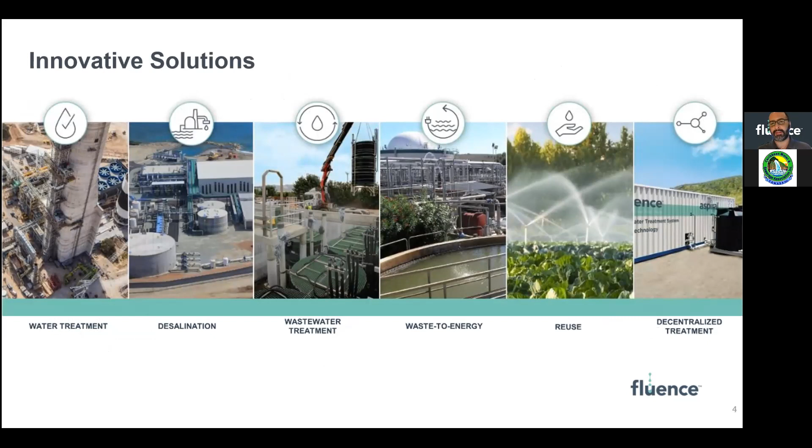In the different solutions Fluence focuses on, we have water treatment, desalination, wastewater, waste to energy, and reuse, and we try to emphasize what we call decentralized systems. Let me know if at the end, or at any point, you guys have any questions—feel free to interrupt. I know my English is a little broken, so I beg your pardon for that, but just keep smiling and try to follow as the conversation goes on.

Mainly, what Fluence focuses on, and how we see the future of water, is what we call the cycle of water. The cycle of water goes pretty much from reuse to treatment to delivery. So we try to make sure that you guys, as public entities and government entities that manage water, always try to close the cycle.

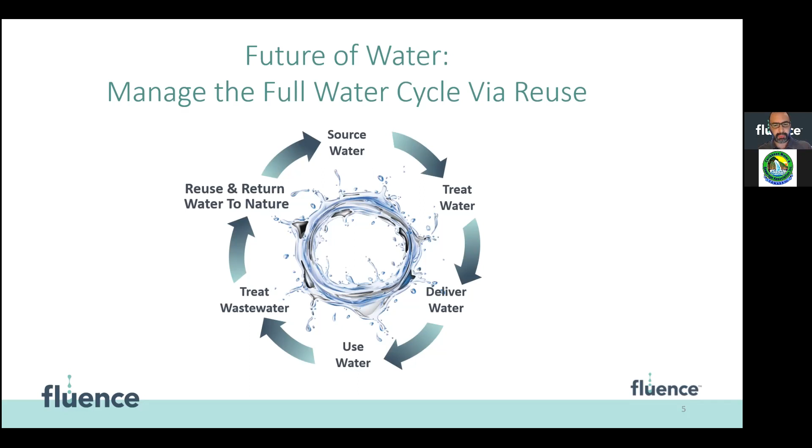One of the things we're going to be approaching today is wastewater. It would be a shame if we're still seeing wastewater treatment plants dumping the reuse into bodies of water after the wastewater goes mainly to the wastewater treatment facility. So that's kind of the perspective we're looking to move away from.

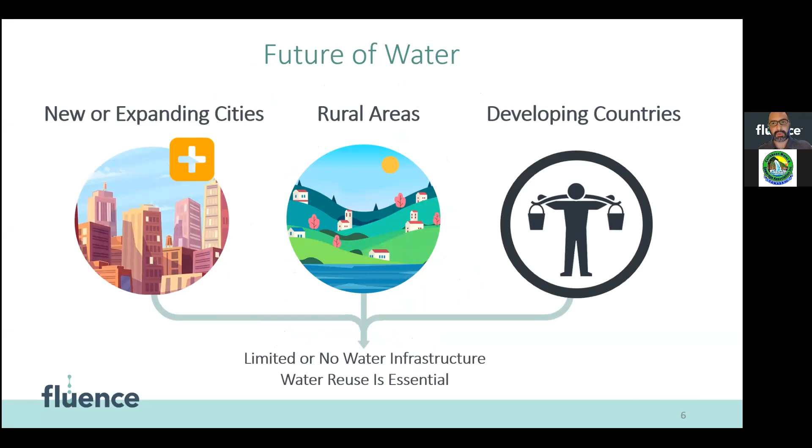Right now, with the future in new cities that are expanding, new rural areas, and all those developing countries where there is very limited or no water infrastructure, it's very essential for us to put good attention on what we are going to be doing, or how we rethink water and what the future of water is going to be for us.

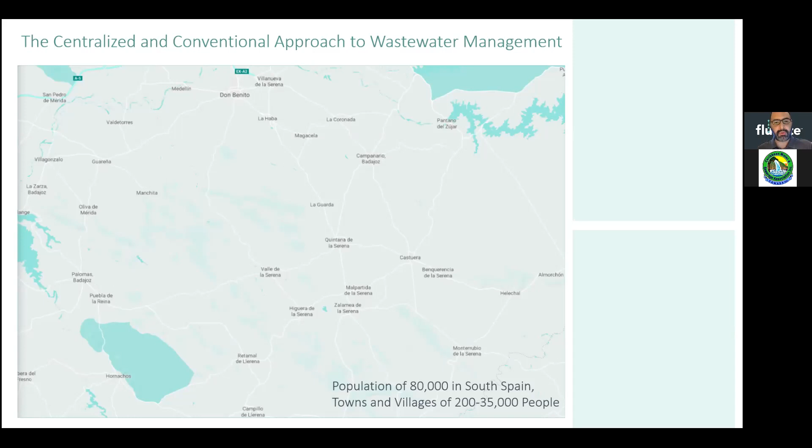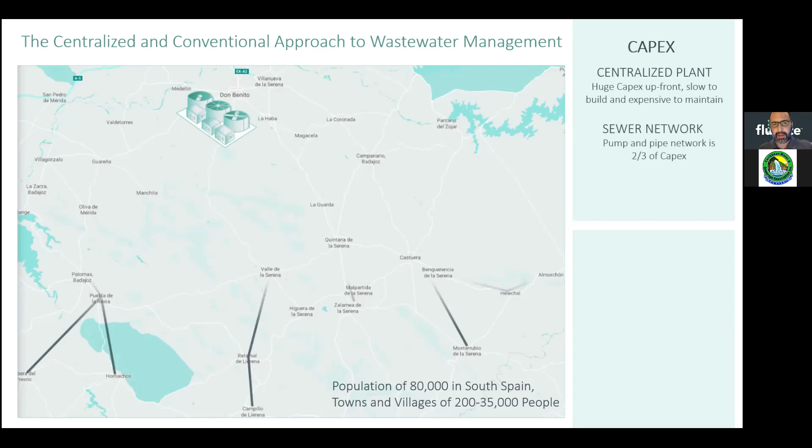Right now, we are going to be focused on the centralized approach, which is very conventional. Everybody in the Caribbean, South America, Central America, is very much stuck into those big mentalities where you have a big wastewater treatment plant, a centralized wastewater treatment plant, and also an infrastructure that pretty much covers two-thirds of the total CapEx that is going to be exposed.

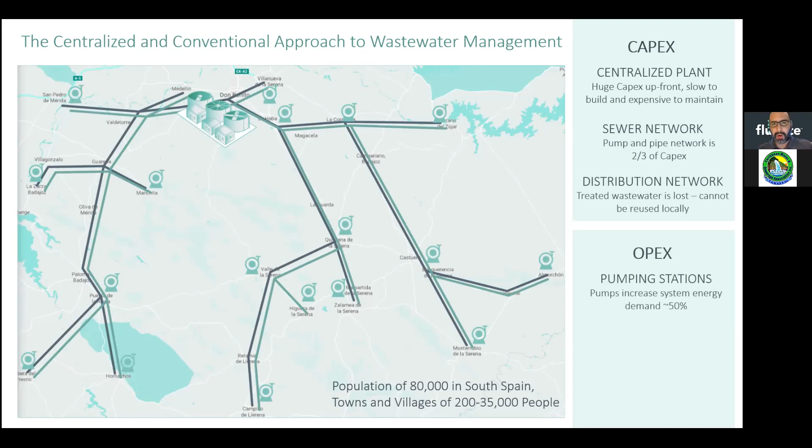At the same time, there's all the distribution network you are going to have. When you add that to the OpEx, you realize how much we are going to invest into the pump stations, the maintenance, and the failures and leaks. So when we talk about all those centralized and conventional systems that apply to all of us here in the Caribbean, we need to move away from that mentality.

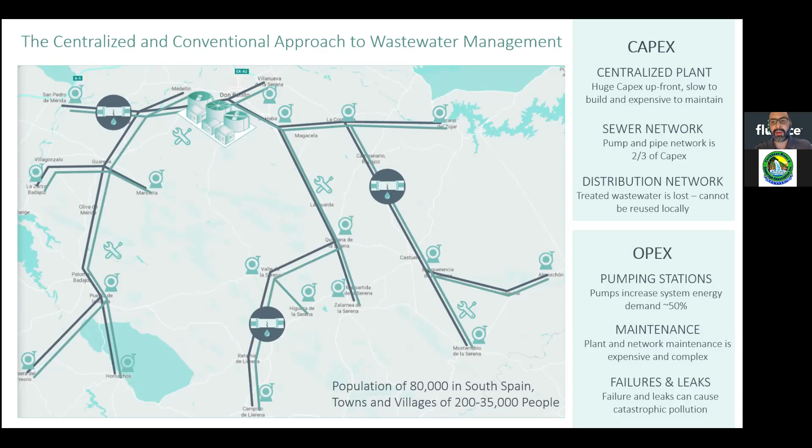As many of you in the infrastructure realize, sometimes the different islands don't lack enough water production or enough water treatment plants. They probably have enough to produce and supply to the whole community, but unfortunately we lose too much in that infrastructure, the piping, and all those centralized systems and equipment that unfortunately make us lose production.

In some cases I've seen in the Caribbean, losses can run up to probably 40% of the total production. I don't want to mention the names of the islands, but I've seen cases where the water lost through leakage could probably supply the whole island.

But at this moment, they are in need to start getting biddings for new projects, for new desal plants. In reality, it's because the infrastructure has degraded and needs rehabilitation. It's a topic we can probably talk about some other day.

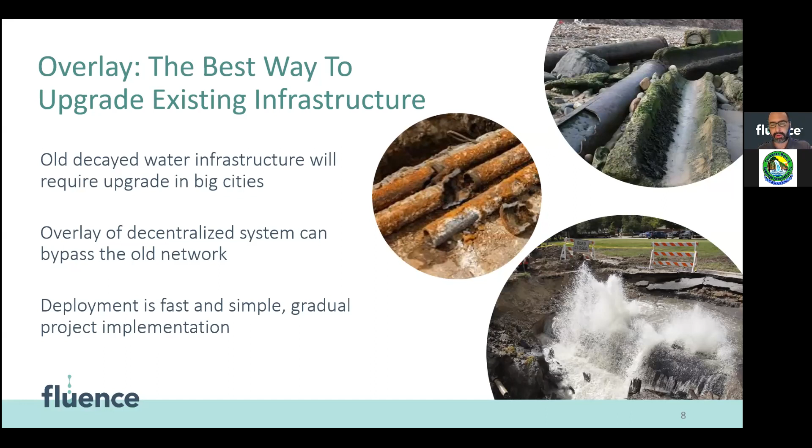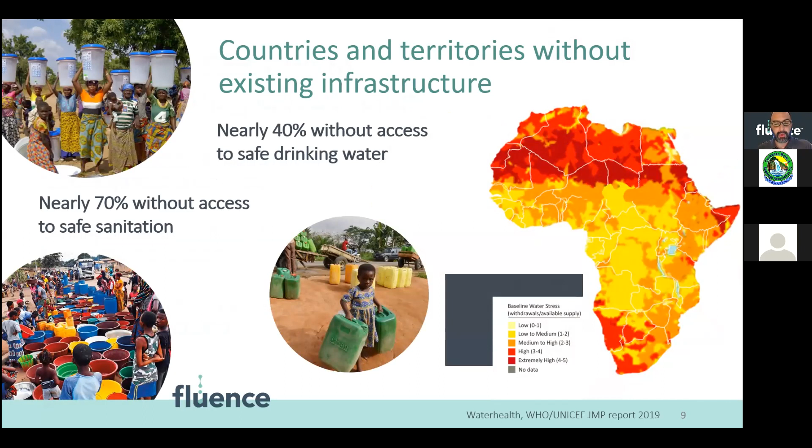So right now, when we think about different countries and the existing infrastructure, and put this all in numbers, we get to the cruel reality that 40% of our communities worldwide don't have any access to drinking water. And it gets worse when we talk about wastewater and sanitation.

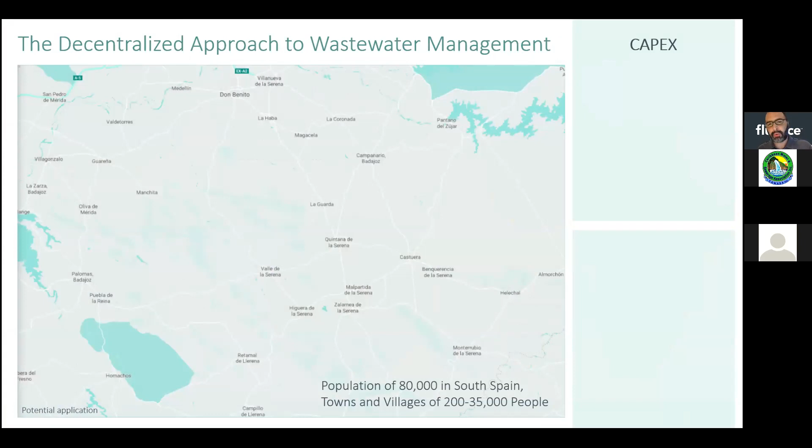So the reason is, when we decide, as FLUENCE - not only FLUENCE, I'll say most companies right now are moving to decentralized systems, where each community is responsible for their own wastewater and their own water treatment plant. That helps ease the CapEx, and it actually helps eliminate costs on piping, pump networks, and large pipes.

When you have those decentralized systems, it's very convenient because you can communicate all those networks. We are in an era of technology - many of you are in different places, and look at us, we are communicating. The same applies to those decentralized systems, where we have a distribution network that is connected.

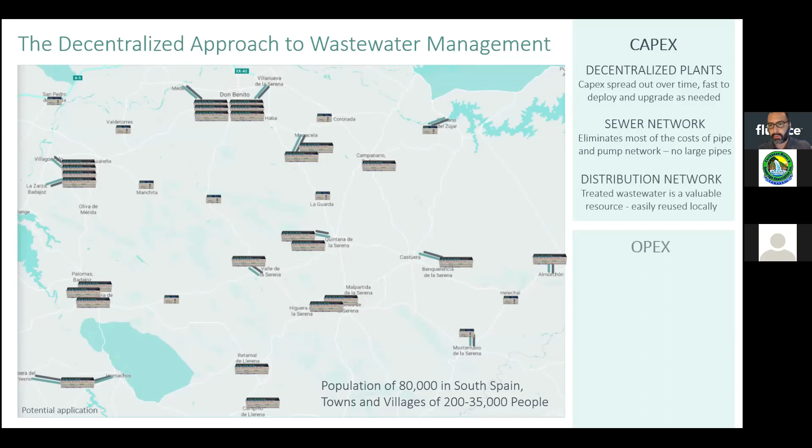When we look at the OpEx and efficiency of the plants, you can reduce energy costs, you can reduce pumping rates. In the operation of the plants, once you have a network, you have a team that can help, or the same communities can do the maintenance - it's just about being vigilant, with communities on top of their wastewater or water treatment infrastructure. So that's the operations side.

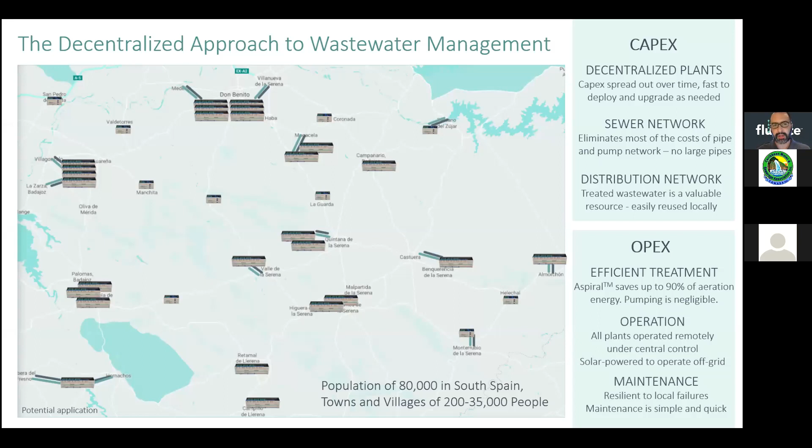And the best part, when you have different kinds of standardized units or a standardized decentralized approach, is that the maintenance becomes easy. You don't have a thousand different parts for pumps, different pipe sizes, or different types of PLCs. You basically have one common system that serves the whole distribution network.

And when you compare the two systems, the centralized and the decentralized, in reality, if we put it in numbers, the decentralized approach can reduce about one-third of the CapEx you would be investing compared to having a centralized, big plant.

Probably the last time that I saw a bid for a big plant was way before 2018, pretty much in Mexico. But in the Caribbean, if everybody starts noticing it, everyone's trying to be self-sustained in small communities, because that's the way to go: to decentralize. You have more value, and at the same time, you get the communities involved and establish their current needs. It's easy to upgrade those plants, so it's a fast delivery and installation.

Right now, not only Fluence, but many other companies are doing plug-and-play installations. Everything is a container or a prefabricated unit, and the civil works are very limited to doing a slab or pillars where you let the plant rest. Everything is coming plug and play.

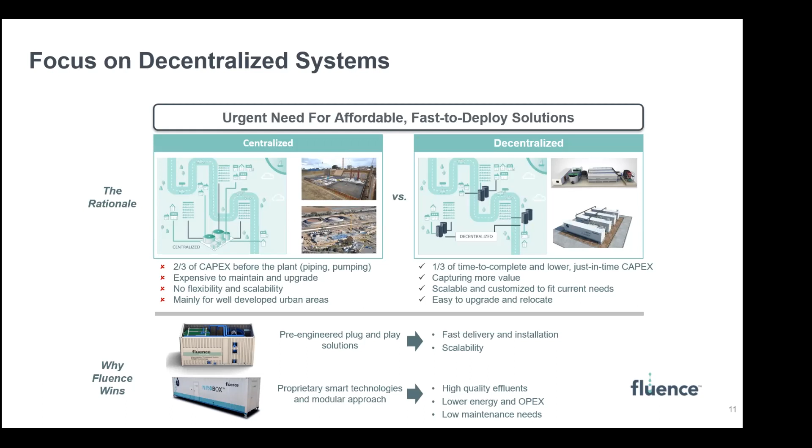You use your inlet, your outlet, how you're going to treat your sludge, things like that, because everything is already prefabricated. So in the different scenarios we have, we try to focus on containerized package systems, because it allows you to be modular, more creative, and easy to deploy. While you do the civil works, you can pretty much build the plant at the same time, so your time is diminished.

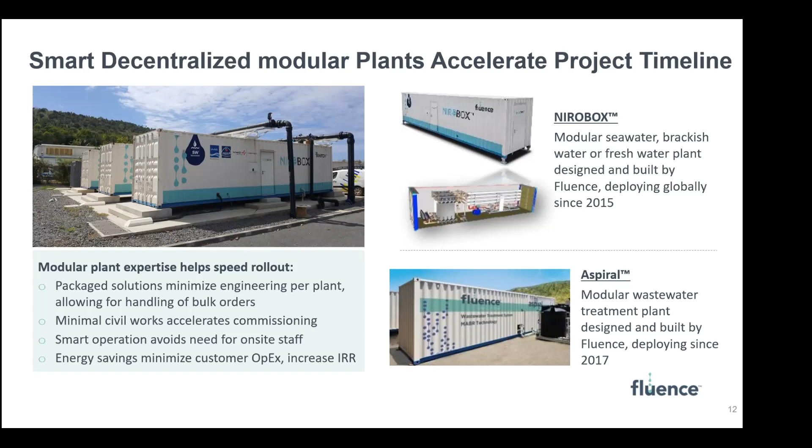Just to give you an example, a plant that we built in Cyprus, this island in the Mediterranean, is 55,000 cubic meters per day. From A to Z, I'm talking from the moment the engineering starts to the moment we commission the plant, it took an average of 8 months, because we were doing everything together.

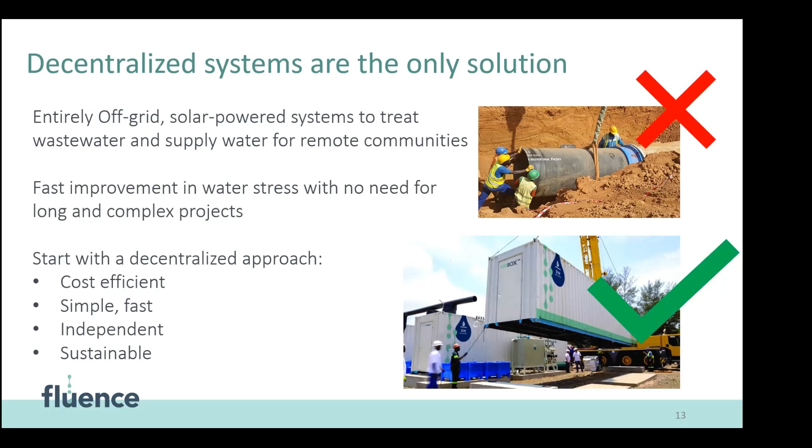So when we go for the decentralized solution, it's because we're trying to be more cost efficient, we're trying to be faster, we have to be independent, and the most important part is that everybody's trying to be sustainable. Sustainable is when you give ownership to the small communities to be on their own, to be self-sustained. That creates a kind of ownership from them to replicate and take good management of the plants or equipment that's handled to them.

Coming back to the future of water and wastewater, right now for us at the different companies it's about the CapEx. Every single company is focusing on reducing the CapEx, and that's pretty much trying to diminish most of the civil works, so you can probably get a better approach.

And also energy costs. Remember, we have to move from those old, good, conventional, very humble processes to processes that have to be more efficient. When you have a wastewater treatment plant where 70% of your bill is the energy cost, you have to look for different options.

Not only that, but look at the different regulations being applied in different countries, in the Caribbean, in the US, where we're moving from just looking at BOD, COD, total suspended solids, conventional TSS, dissolved oxygen, but also looking more at the toxicity of the water and nutrients. So right now it's more about the total nitrogen being removed by the plant, and the total phosphorus.

Unfortunately, if we go by the conventional process, that's not feasible up to some point. And if you want to upgrade the plant, you pretty much have to build another additional tank, or different components, to allow you to reach that goal.

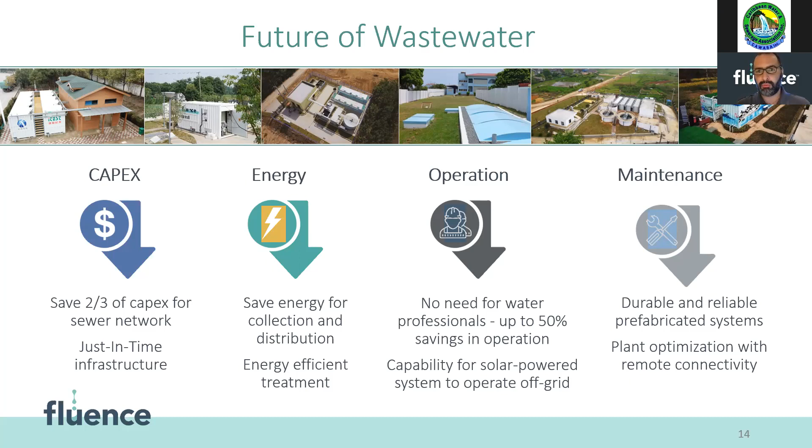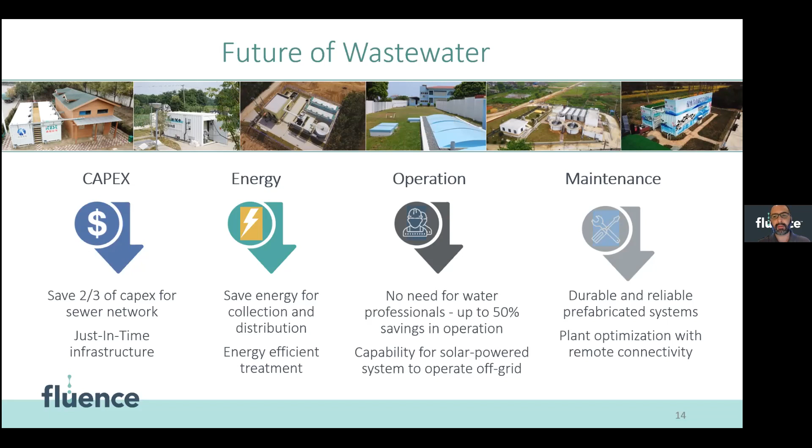Right now, most of the plants that we build are not only for our own personal commitment, but also for liability reasons, and to provide additional information. As FLUENCE, we have most of our plants in remote monitoring. That means we have access to getting the information, and at the same time we imply to the customer: you have to collect the information, put it on your phone, put it on your tablet, by all means, but don't leave it on just a piece of paper that is going to be handled later on.

So right now, one of the processes that we are implementing is the MABR. Many of you already heard it's the membrane aerated biofilm reactor. We have to focus on this: one, it will be the retrofit, and also what we are saying is it's going to be more like decentralized systems. But prior to that, for those that don't have the concept of the MABR clear, let me start with a brief differentiation between the membrane that we all know, very common in our market, MBR or MBBR.

So where the MBR is pretty much a direct filtration process, you have a physical barrier where you have a membrane that is going to be doing the filtration. And in the other process that we are referring to here, let me show you with the point.

So here, when we refer to this, it's the biological process where we are going to have a biofilm over a membrane. I know it's hard sometimes for you to see, but this is what we refer to as the membrane, and this is the material. So here in this part is where we are going to create that biofilm. And look at this, it's pretty much like an envelope, it's going to be a large size, and I'm going to explain later on how the process goes. But at the beginning, I just want to make that differentiation clear.

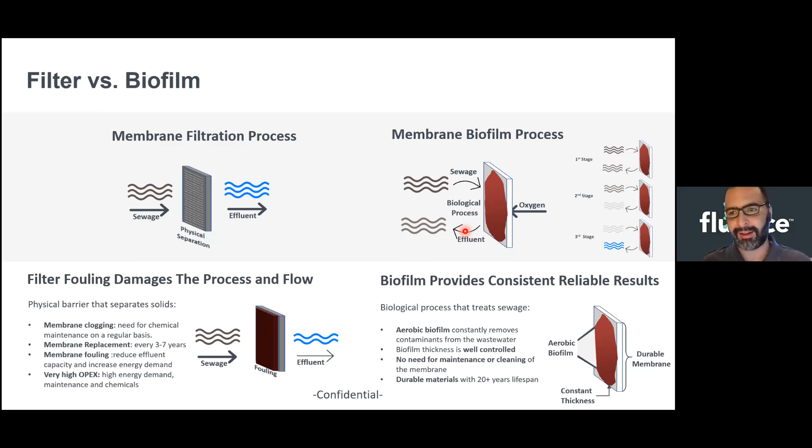When we go through the different processes that we've had over the past 70 years since we started treating wastewater, most of you are pretty much used to activated sludge by extended aeration, but also lagoon systems, as well as MBBRs and SBRs, and those are very common biological processes.

So when we compare what the MABR benefits or evolution in wastewater treatment is, it's pretty much when we talk about the mechanical aerators. When we talk about mechanical aerators, it's probably one of the first ones when we try to push the air or bring the water in contact with the air, to expedite the biological process that is meant to happen.

And also later on, we changed to coarse bubbles, and after that we changed to fine bubbles, and finally we come to the MABR. The difference, as you can see, is the amount of energy that is required to treat a cubic meter in each one of the processes.

If we go into the surface aerators, we are going to be doing 2 to 3 kilowatts per cubic meter treated. So if we go into the MABR, it's a big, huge difference, because we are talking probably less than a quarter of a kilowatt per cubic meter. I just want to make a clear differentiation in this one. When I'm talking about these numbers, I refer to the biological secondary process.

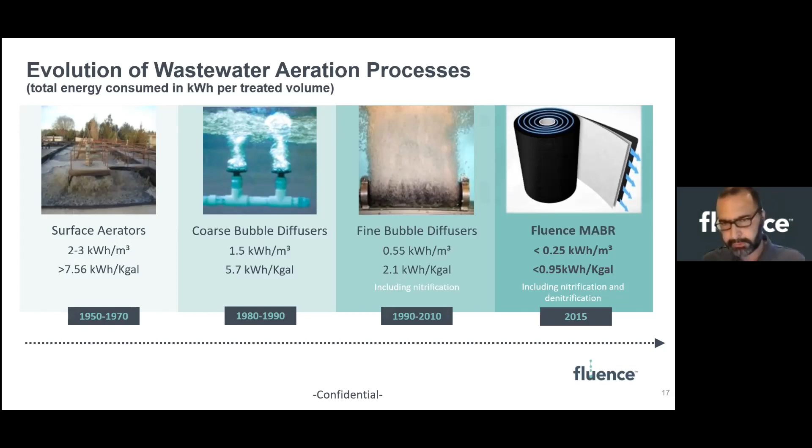So when I talk about the MABR, the first thing that I tell the customers is, imagine it's going to be a stationary bubble that is submerged in your plant. So we are trying to go from a system that only allows you to use 10 to 15% of the oxygen trapped in that fine bubble that quickly runs through the water, to something that is more stationary and allows you to use the total oxygen that is being delivered to the bubble.

So the MABR can also be compared to your lungs. And if you look at the competitors, one of them calls it the ZeeLung, because it's the same functionality. Don't picture the membrane as having little tiny holes, because there are not going to be holes or anything. It's pretty much like the air in your lungs: what needs to go into your bloodstream is the oxygen. It's called the passive diffusion of oxygen into your bloodstream. It's the same. If you look at the membrane, the MABR has the same functionality.

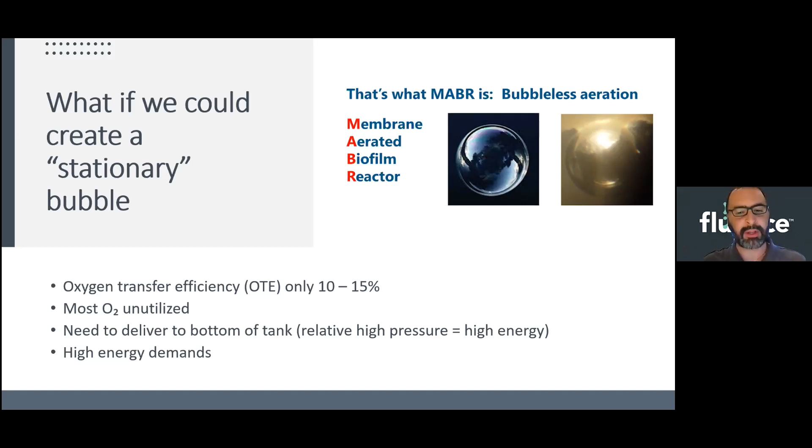So it is trying to find better ways to transfer oxygen and find a more sustainable solution. So instead of having that bubble travel through the column in a matter of seconds, you have this stationary bubble that will, in the end, dissolve into the liquid. So that is pretty much what we are doing with the MABR, or what this technology refers to.

Probably here it's going to be easy for you to understand, because here is the membrane. Ours is a flat sheet; this is for illustration. So here is our membrane, and inside the membrane you have air. The air creates a high concentration of oxygen on that part of the biofilm. If we start following the process, on the membrane there is going to be a growth of the biological film. This is our biological film that is going to be growing.

So in the first stage, we take the ammonia that is here, and it meets the high concentration of oxygen in this part. For everybody that knows, that is the nitrification process. When that ammonia meets the high concentration of oxygen, it creates the nitrates.

Those nitrates take the COD as our carbon source, creating our denitrification process. So here in the biofilm, you have simultaneous nitrification and denitrification, which allows you to save in your aeration basin the energy that would be utilized for removing the COD, which is very related to the BOD.

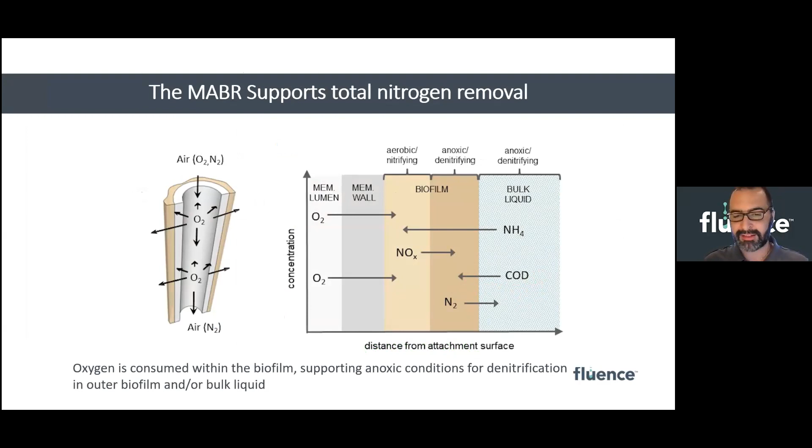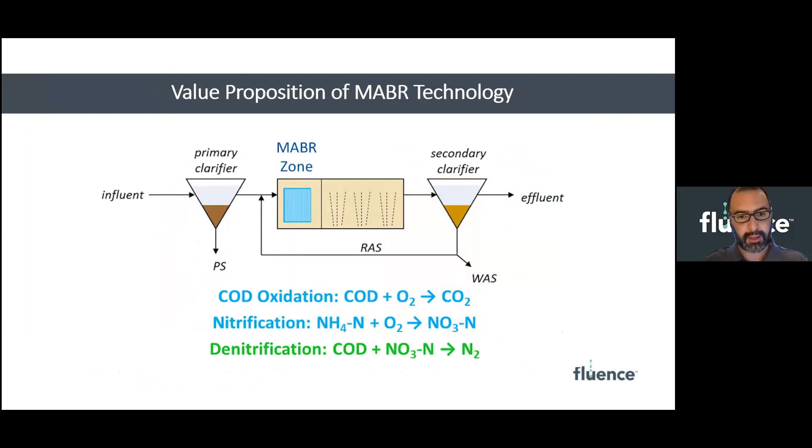So that is when FLUENCE came with a solution: it's better to create a self-breathing membrane with a thin film that allows you to create the best options for denitrification and nitrification. And that's with several years of trial and error to get to the best specifications.

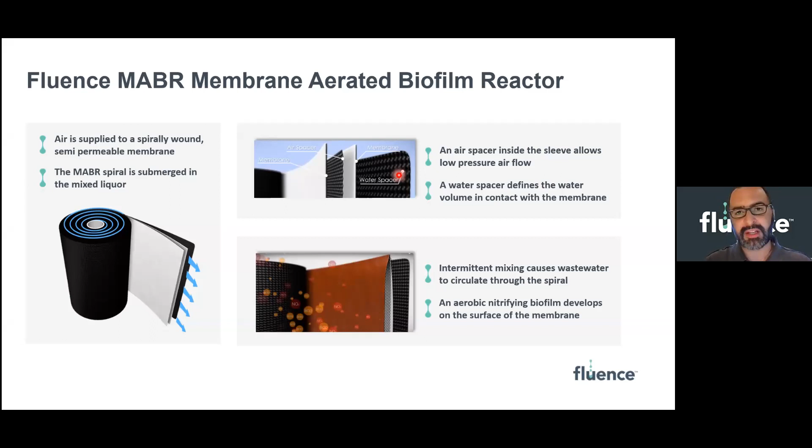So as I showed you before, you have the membrane that is this roll, and in this roll you have the first layer, the membrane outside. Inside you have the air going through, just like a bubble. And you have your spacer in between two layers of the same membrane. At the end, you have this black sheet that is the spacer. The spacer also allows us to grow the biofilm, and allows you to get the benefits when you have good mixed liquor in the process.

So what are the benefits of the MABR process? It's going to allow you to diminish many of the nutrients that we are looking to treat right now, especially the total nitrogen. With the MABR, across the different plants, our common denominator is to get results probably below 5 in total nitrogen.

The total phosphorus, we can say we remove almost 90%, and that is because of the biological process. It came along through trial and error, because we never looked to remove phosphorus at the beginning, but through the different iterations, we realized that the biofilm, depending on the thickness and the stage, allows you to do a better gradient removal of the phosphorus.

The second most important benefit, I will say, is the energy savings. If you have a 200 horsepower blower, you are not going to need that 200 horsepower blower. You are probably going to need a 20 horsepower blower. It's going to do the same function, but with less energy required, because most of the process is being done by the autotrophic and heterotrophic bacteria in the nitrification and denitrification.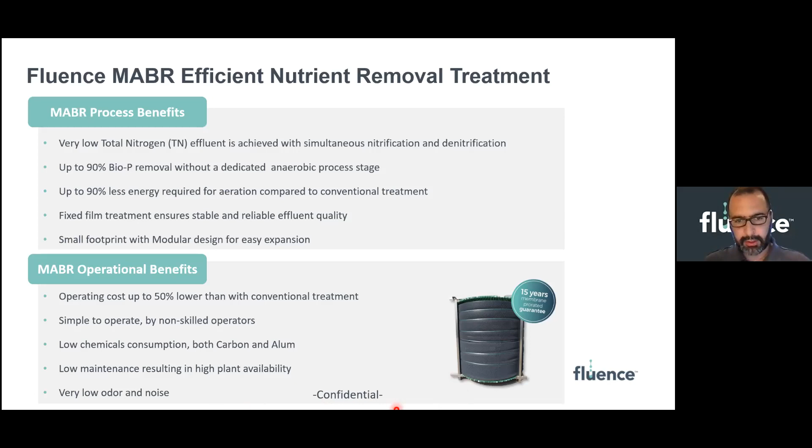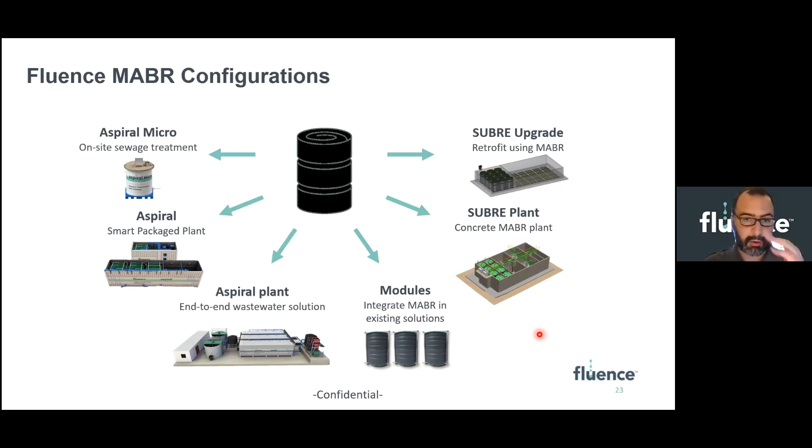So right now, going to the different processes of the plants, these will be the configurations that at Fluence we have. We have the micro, that is for small households, farther away communities. We have the Aspiral, that is going to be the package, hotels, condominiums on a larger site. We have the Subre models, and the upgrades: Subre Greenfield, Subre Retrofit, and it's going to be the upgrades for the plants.

So these are the different capacities that we are trying to go with the Aspiral, the containerized units, and it will be from 20 to 50 to 5,000 cubic meters per day. Greater than that, it will be feasible. Unfortunately, it will be too much horizontal construction. And sometimes in the Caribbean, we know that the land has some value. So we can move to different capacities, for example, when it's 2,000, move to a Subre, when we can do a vertical construction, so a deeper tank,

it will allow us to do a more efficient and much smaller process. I have a case right now, for example, in Panama, where we are changing a 14,000 cubic meters per day wastewater treatment plant by oxidation ditch. And the reduction of the area is 2/3 of the oxidation ditch. And in this case, we have 4 channels, trying to mimic the 4 trains of process that were there. So it's a very good reduction when you can do deeper tanks, because the Subre models will allow you to do that.

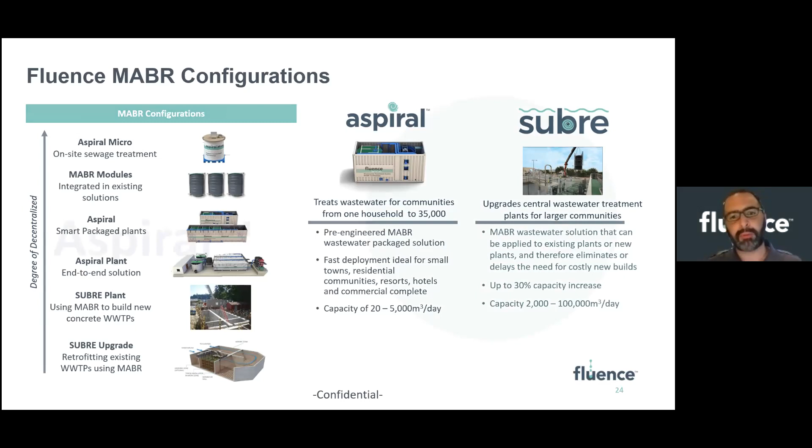So these are the Aspirals. As I mentioned, we have the small one, a 20-foot container, which can be 50 cubic meters per day. The 40-foot containers, the Aspiral M, is pretty much everything used in the plant, where you have your clarifier, you have your aeration, you have your recirculation. The only thing that you will not have will be your equalization tank.

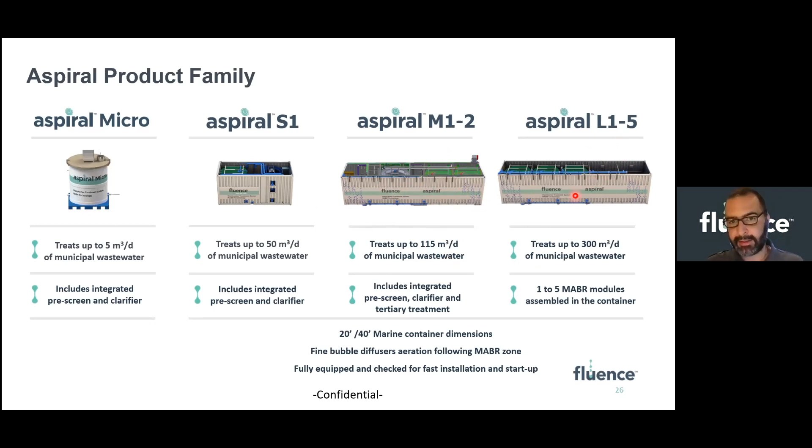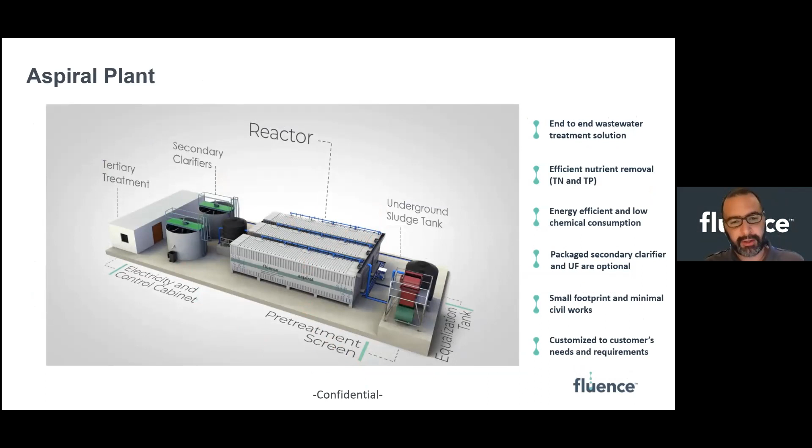And you have the Aspiral L, and it's for when you want to build your secondary clarifier, and you just want to increase the capability of the reactors, you don't need to buy the units with the clarifier inside. You just go and buy the units, and you just build your clarifier, keeping in mind that your pre-treatment is still doing the same.

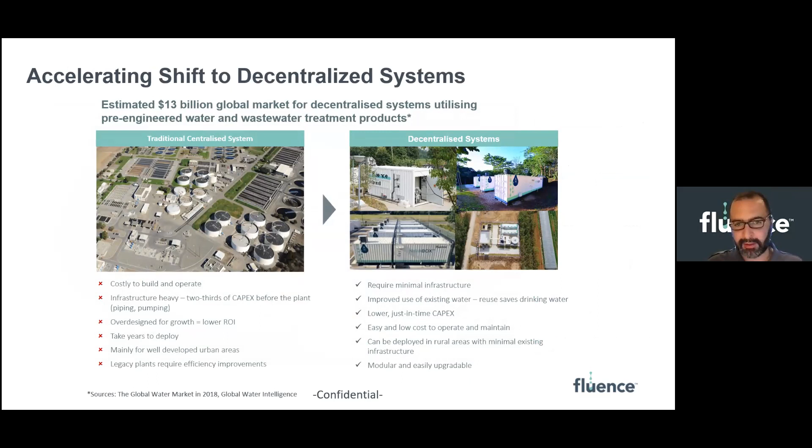This is pretty much because we want to accelerate those decentralized systems where there is minimal infrastructure, and pretty much everything in the plant is plug and play. So everything is ready to put into the plant and ready to roll on. Even the control panels and the instrumentation - but don't forget that at some point you have to bring electrical power from the plant to the mechanical equipment, like the blowers mainly, because those are usually put outside of the plant.

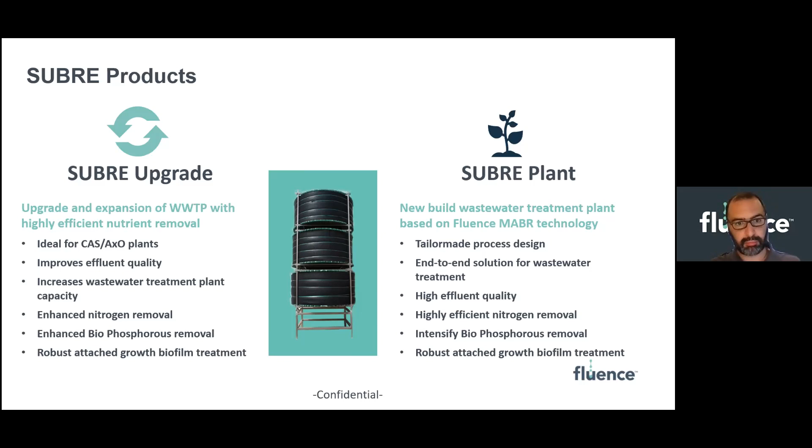This principle initially applies when you want to retrofit some plants, or when you have new but deeper tanks. In that case, yes, we can reduce the cost, we can enhance the nitrogen removal, and also when you want to increase the flow of a facility, we can help you with that. But also keep in mind that when you want to increase the flow, you're also going to have to increase at some point the junction box, or probably the pumps that are feeding the plant. Because not only will it increase the flow, but the pretreatment has to be increased in order for you to handle all that flow with the same infrastructure.

And it's very convenient because we don't have to add all that conventional infrastructure, like another mixer or another anoxic tank. It was very commonly used by us in the past.

So when it comes to the operator part, I tell them this is a static element that you're putting into your plant. So it's the same operation that you've been doing on blowers, the same operation you've been doing on diffusers, the same operation you've been doing on pumps, when you compare it with the conventional process. This is the membrane - the other thing is you have your inlet and your outlet, and these membranes are built to last at least 15, 20 years.

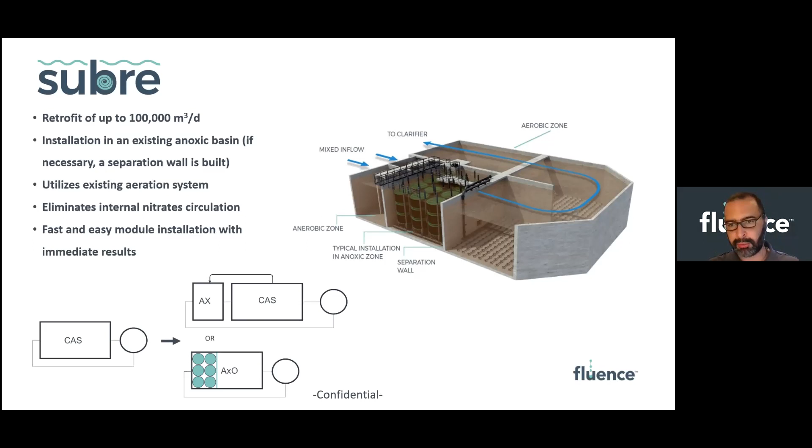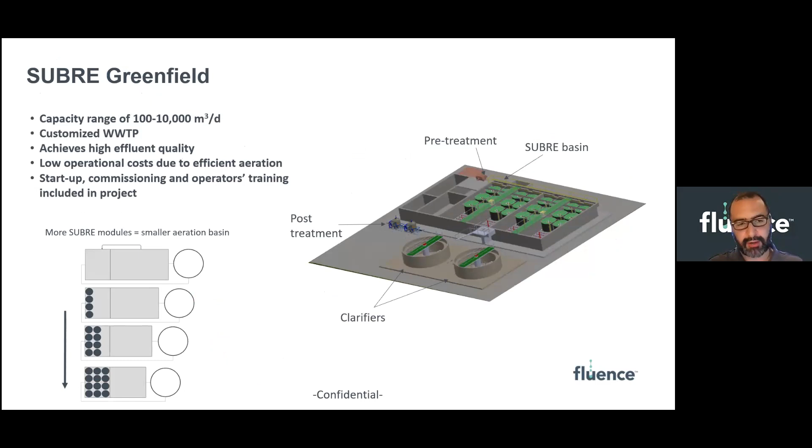So this shows the different configurations you can see on a plant, in case you want to diminish all your space and add as many MABR elements as you have in the plant. Keep in mind that your energy cost will probably get lower and lower over time.

So here are some of the results we're obtaining when it comes to treating the COD in the different stages. Compared with the conventional process, it's more likely that we have more removal, but with less energy consumption.

Remember, in one of the initial slides, I showed you how the process works when we take the COD as a carbon source with the nitrates for denitrification. The same thing applies here - the COD that gets to your final clarifier is going to be minimal.

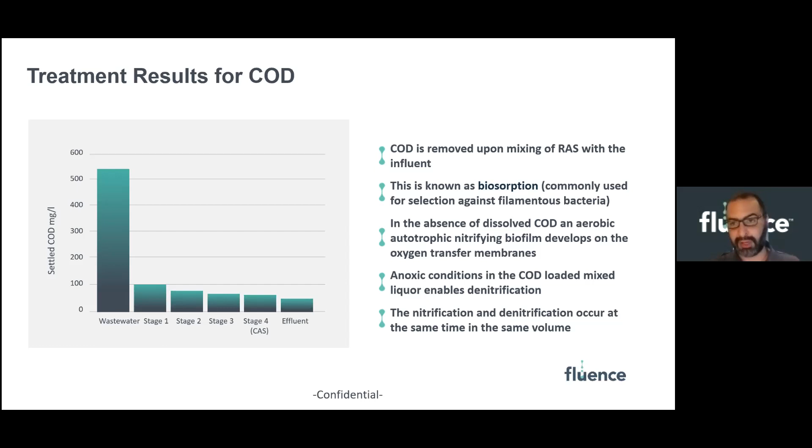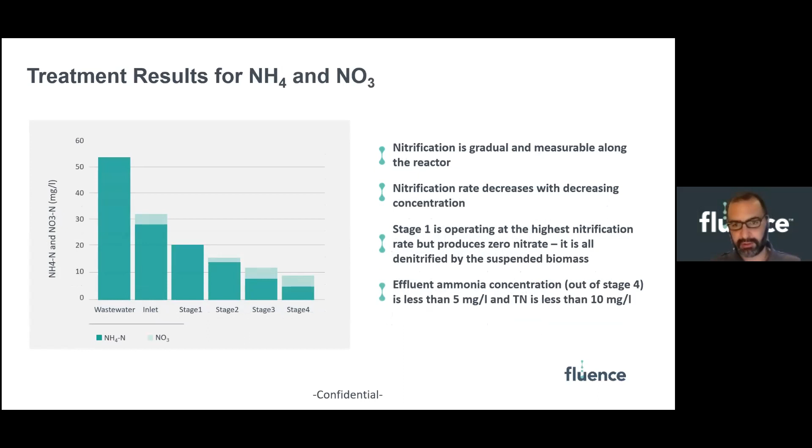When we're talking about the ammonia and the nitrates, it will be the same stage - you're going to see more and more reduction as you advance through the stages. The total phosphorus at the beginning, you're going to see it's not as efficient, but as you go further into the stages in your plant, you're going to get more and more efficient reduction of the phosphorus.

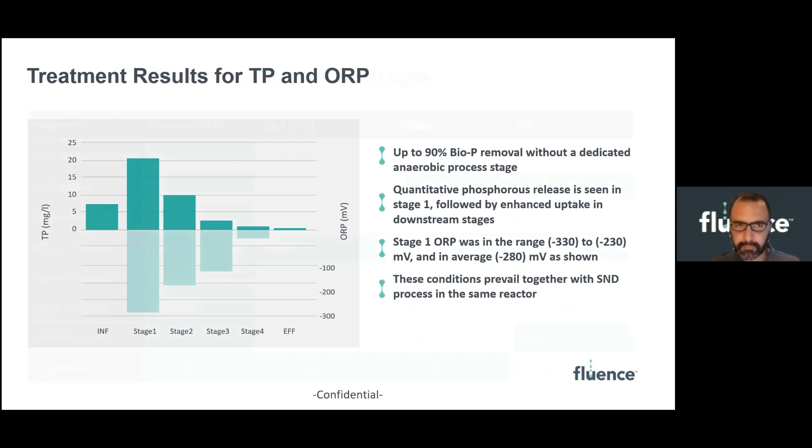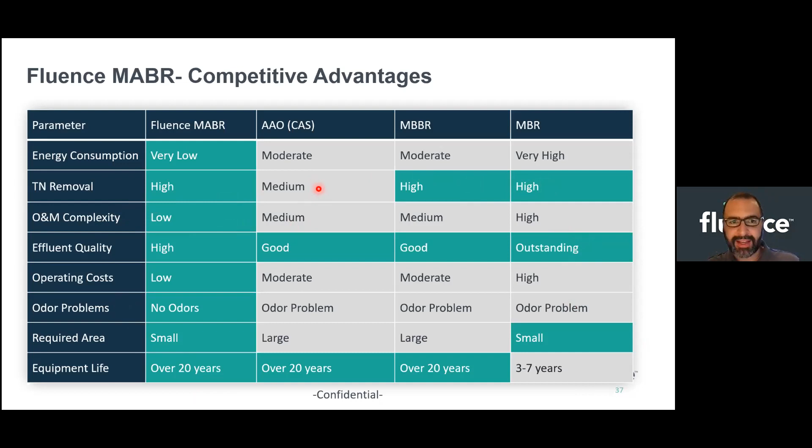For example, if we compare all of these technologies with effluent quality, there is no doubt that the MBR will give you an outstanding quality. The MABR will be better than the conventional while energy consumption is less. Total nitrogen removal, for example, is very high in these cases. But when you compare with the MBBR, the energy consumption is not as great as it is with the MABR. So this is a comparison of why the MABR wins against the others.

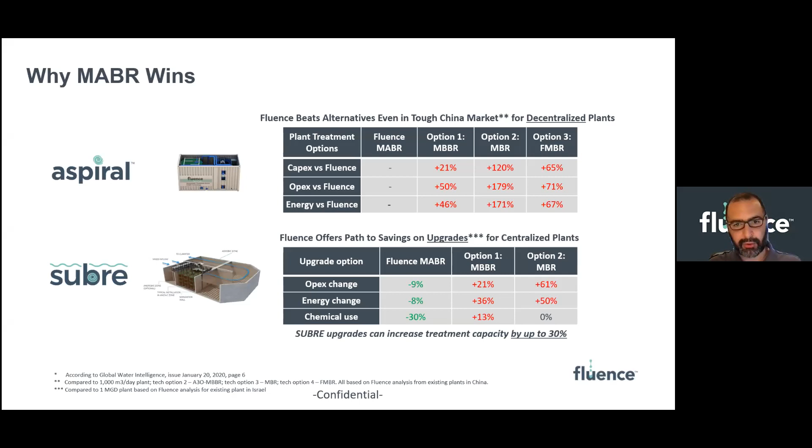This is pretty much by the numbers, and not only by Fluence, but by different entities, we are getting this technology validated by different entities.

So most likely common right now for you guys, it will be Stanford Engineering, the Stanford University, Black and Veatch, we already being validated. CENTA is another institution of wastewater treatments in Spain.

I remember as it happened in Jamaica, it was a process of almost 2 years to get the technology validated, but it's being implemented. And as it's been implemented in one particular Caribbean island, I believe it could be implemented elsewhere because the benefits are greater.

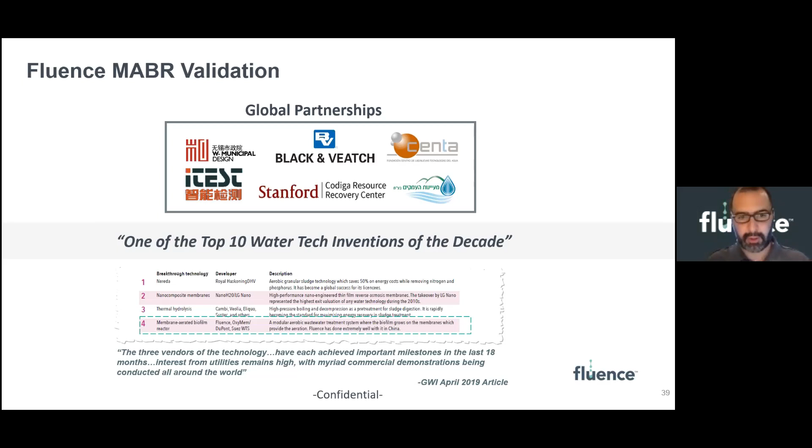So all that brings us to pretty much a summary of what Fluence is doing for the environmental and sustainability impact, due to the different projects and how we are participating.

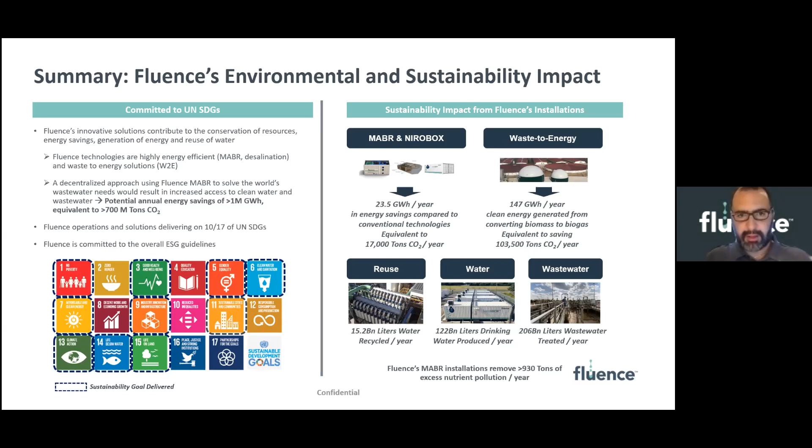That is good for you as well, how to participate in and try to commit to all those 17 goals, where Fluence at this moment is pretty much committed, allowing you to cover 10 of the 17 goals based on what we are approaching right now. So this is the sustainability, the 17 goals.

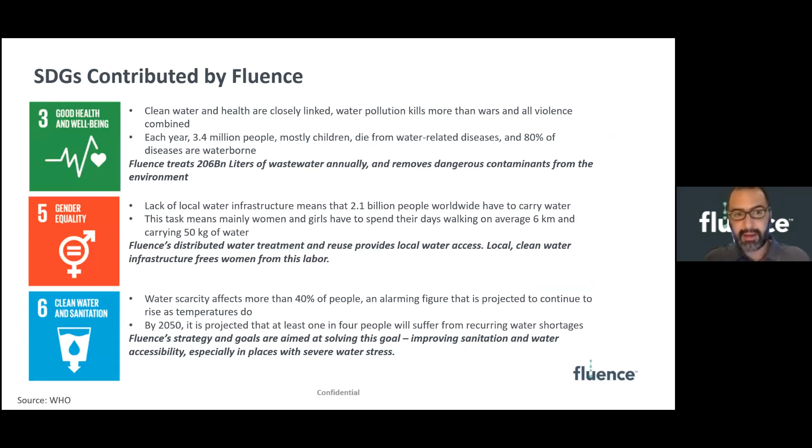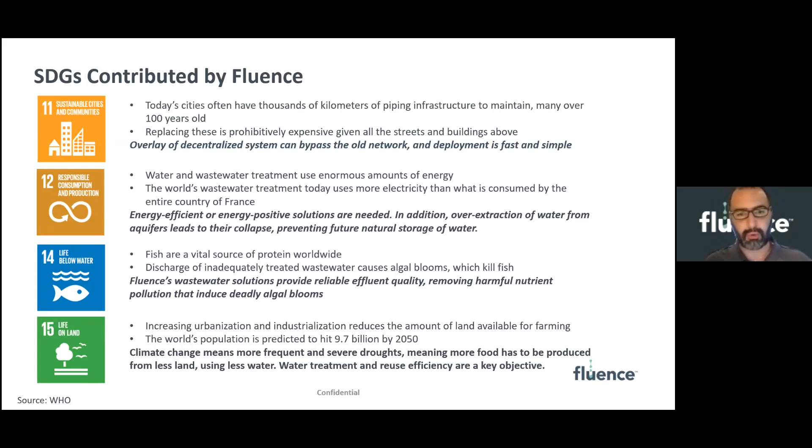For me, the most important is that we are actually participating in clean water and sanitation, and also affordable and renewable energies, as well as being a sustainable option for the different cities and communities we are working with right now, getting into the new phase to be self-sustained.

So by the numbers, pretty much the annual savings on energy that Fluence is approaching is close to 23 gigawatt hours only by the MABR, and also the NIROBOX.

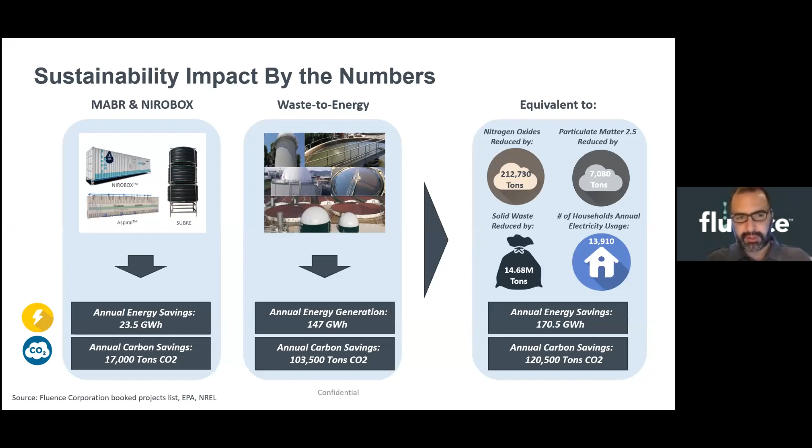That is a desalination plant where Fluence has at this moment the most efficient plant in a single container when it comes to energy use. Through different other projects like waste to energy, we show how much we are saving on carbon, the annual impact that Fluence produces.

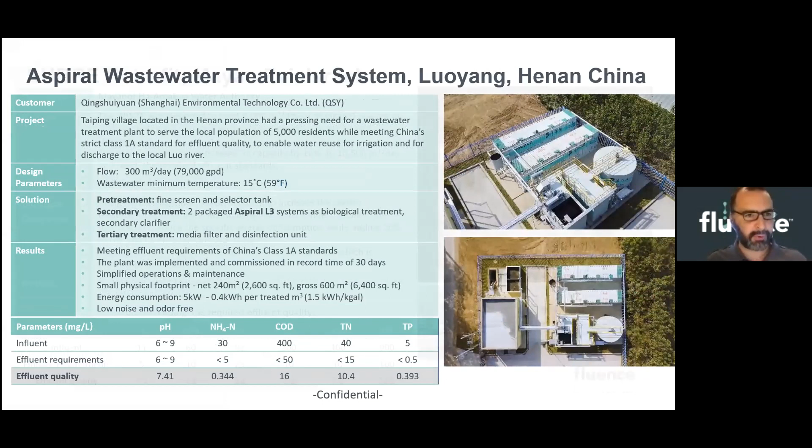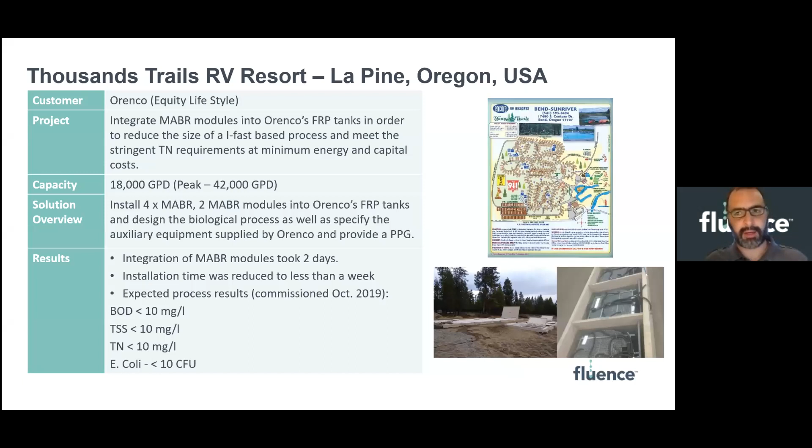So this is pretty much coming to an end. Those are the different case studies, and I invite you guys to see them on the Fluence webpage. I also invite you to visit not only Fluence, but the different entities you guys are being approached with, for new technologies, to get more approach and more knowledge in that.

Also, at the same time, I will say it's good for you to look at this. It's not only Fluence, but also many other companies have the same approach, where when you visit, it gives you help on the design of the wastewater treatment plant, and also on the water treatment plant, depending on what your influent and effluent requirements are.

At the same time, another tool that's good for you, and is being utilized by many other companies, is when you have to compare your current plant to what it could be, using my energy calculators. Because remember, in wastewater treatment at this moment, the most important element is pretty much the energy - how you can reduce the energy and how you can improve your nutrient removals for the plant.

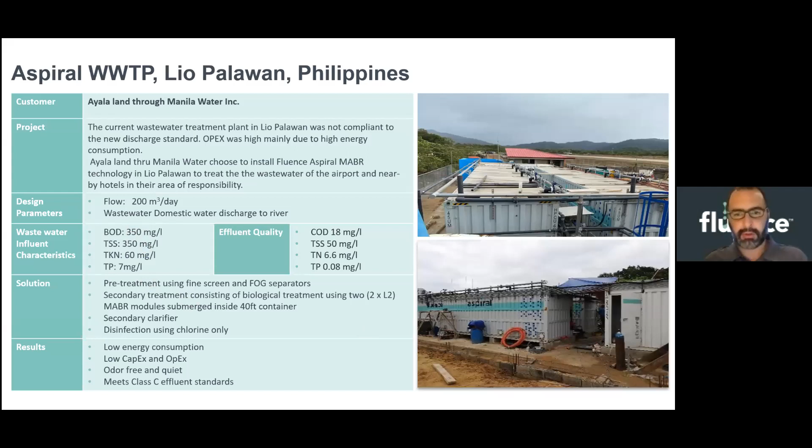So continuing to the same, I believe so, Ignatius. So if you guys have any questions, it will be right now the time. I don't want to emphasize too much into the different options, into the different projects.

At this moment, worldwide we only have 260 MABR plants installed, when you compare with the millions of the different processes. So it's a new process, like the MBR back in the 80s, when nobody had too much trust in that.

But look at it now, there are 1,000 of those MBR installations worldwide. So it's the same approach and the same slow movement. So we have to see, I start to embrace it, the new technologies, and try to apply it, because there is a lot of benefit.

I'm telling you, not only from my side, but also from all the participants that have been working on this process with this new technology. So with that, I'll let you take back, Mr. Ignatius. Yes, thank you, Alex. That was a very comprehensive presentation on some of your new technologies, and I'd like to thank you immensely for that.